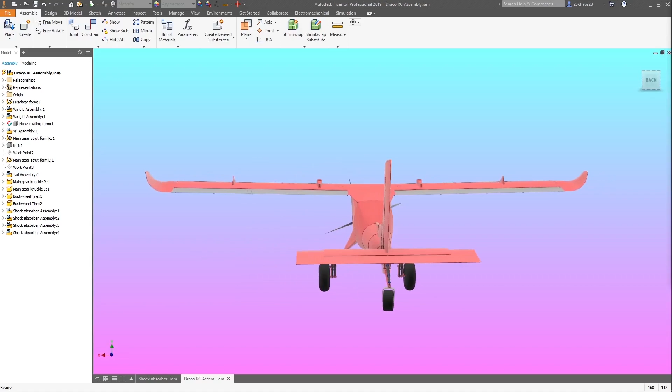And there we have it. Yeah, so it's looking pretty good now. It's looking pretty good with the wheels and the shocks and all the things, you know. Yeah, it's looking good. Well, what a year.

Tell me about it, right? 2020, huh? So 2020. God, that's going to be a thing now. It's going to be like, something bad happens, like, dude, that's 2020. Like, I don't know, memes. I'm not a meme person. I mean, I get memes, but I don't do memes. Does that make me a bad person?

Anyways, yeah, you guys enjoy your Christmas. I've enjoyed this year so far. I hope you guys have had a good year, bad year, good year, whichever. It's a year, it's like any other. There have been worse years in human history, so it's not the worst, right?

Yeah, so yeah, that'll do it for this year. Catch you back next year with episode 6. We will be working on the variable pitch prop assembly and the motor housing and all that fun stuff. So that'll be interesting to keep an eye on. I hope you guys are still around for that.